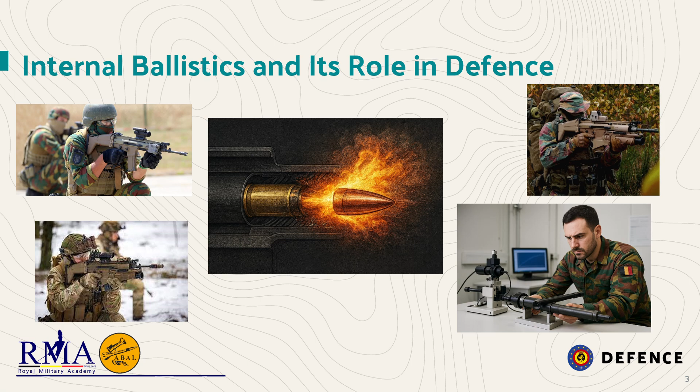This study strengthens this mission by addressing one of defense's most persistent challenges: barrel wear. Today, the end of life of small caliber barrels is decided mainly through experience and simple gauges, with little correlation to firing history or pressure behavior. Our study replaces this empirical approach with a data-driven scientific method based on the most advanced measurement technologies.

Our mission is clear and threefold: quantify, compare, and predict erosion in standard 5.56 x 45 mm barrels. We chose this caliber because it's the workhorse of modern militaries, representing the most common system where reliable performance is non-negotiable. To achieve this, we had to compare wear generated under controlled laboratory conditions with wear observed under realistic operational replication. Furthermore, we evaluated two critical measurement tools: the CMM scanning for high accuracy analysis and pin gauges for field level efficiency.

Ultimately, the goal is predictive maintenance, replacing guesswork and round counting with objective, physics-based data. We need to know a barrel's exact condition and anticipate its lifespan before performance degrades or, critically, before a safety risk emerges.

Barrel erosion is more than just material rubbing off. It's a brutal, complex process. Each shot exposes the bore to some of the most extreme conditions found in any engineered system. We are talking about temperatures above 2000 degrees Celsius, pressures greater than 400 megapascals, and the intense friction as the copper jacket of the projectile engages and deforms into the steel rifling. Add to this the chemical aggressiveness of propellant gases, and you have a perfect storm that removes microscopic layers of steel.

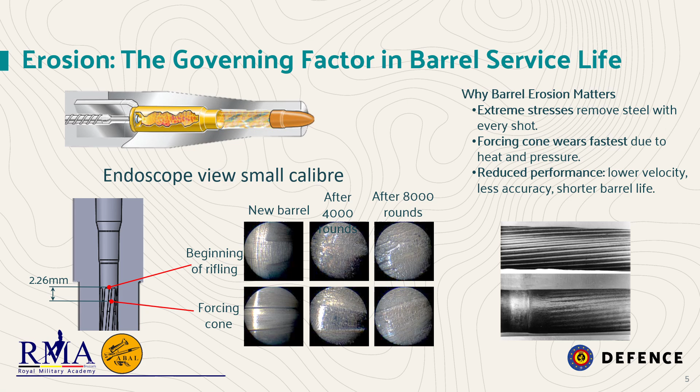Why does this matter? Erosion alters geometry, which in turn affects internal ballistics, leading to a loss of muzzle velocity, reduced pressure consistency, and ultimately a significant drop in accuracy and precision. Over time, it reduces reliability and introduces potential safety risks, making erosion the definitive factor in a barrel service life. To address this problem, we employ the dual platform methodology to ensure our findings are both precise and realistic.

Our first test world was the Ballistic Interchangeable Manometric Cannon, BIMC, in the laboratory. The BIMC provides absolute control over variables. We can isolate pressure curves, control the type of propellant, and maintain a fixed firing rate. This precision allows us to establish the fundamental wear relationship.

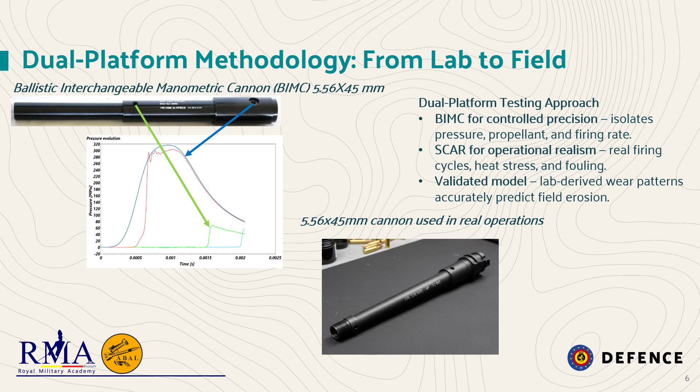Our second test world utilized the FN-SCAR barrel under operational replication. Here, we introduced real-world simulated conditions, varied firing cycles mimicking combat usage, actual temperature spikes and cooling periods, and the inevitable effects of fouling and carbon buildup. By comparing the BIMC's controlled precision with the FN-SCAR's operational realism, we could effectively validate whether laboratory-derived data accurately predicts field-induced wear.

Quantifying this invisible, gradual process of erosion requires sophisticated tools. We needed methods that could map the wear for research purposes, and methods that could be used quickly and reliably by an armorer in the field. This led us to our dual metrology approach. Our philosophy was simple: synergy. We required one tool for micrometric, research-grade precision, and another for robust field-level efficiency.

The first tool is the Coordinate Measuring Machine, or CMM. This provides a high-resolution 3D map of the barrel's internal geometry. It is our absolute ground truth for volumetric wear. The second tool is the simple, yet highly reliable steel pin gauge. This is used for quick, reliable diameter checks directly in the field.

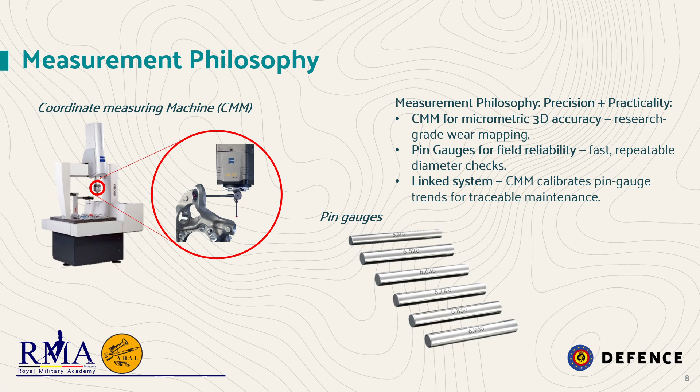The crucial point of our methodology is using the CMM data to validate and calibrate the pin gauge trends. We establish the link between the two, providing a traceable and dependable method for maintenance personnel.

The CMM scanning process using a sophisticated Zeiss Contura provides high-precision geometry mapping. This machine uses non-contact probing to take millions of data points from the bore. Critically, we perform circular scans every 125 micrometers along the forcing cone. That resolution is necessary because erosion isn't uniform.

This can generate detailed 3D wear profiles and dimensional maps. The data then allows us to calculate volumetric material loss. This is the most objective, physics-based metric we have for tracking wear. The CMM effectively transforms otherwise invisible wear into quantifiable volume loss, clearly exposing the severity and localization of the erosion zones.

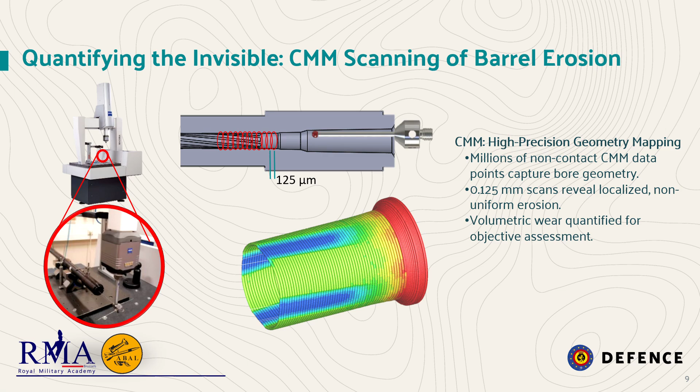In contrast to the CMM, pin gauges represent the practical, fast, and reliable side of our metrology. These are essentially hardened steel rods of precise known diameters used for bore diameter checks. They detect wear in small incremental steps, often down to the tenth of a millimeter or less. They are portable, cost-effective, and require minimal training, making them perfect for routine maintenance level inspections.

The entire procedure, inserting the pin and measuring the depth at which it sits, takes less than 2 minutes. This rapid data acquisition is the key to incorporating our research findings into a workable field maintenance schedule.

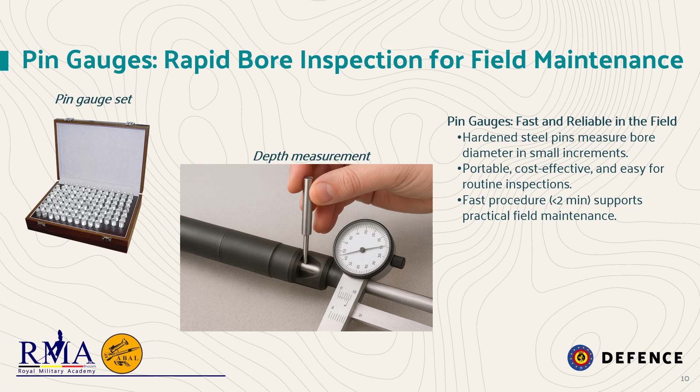This section is the moment of truth. Our research hinges on a core hypothesis. Does controlled wear generated in the lab truly reflect what happens to a soldier's rifle in the field? By comparing the results from the BIMC and the FN-SCAR, we can validate our methodology.

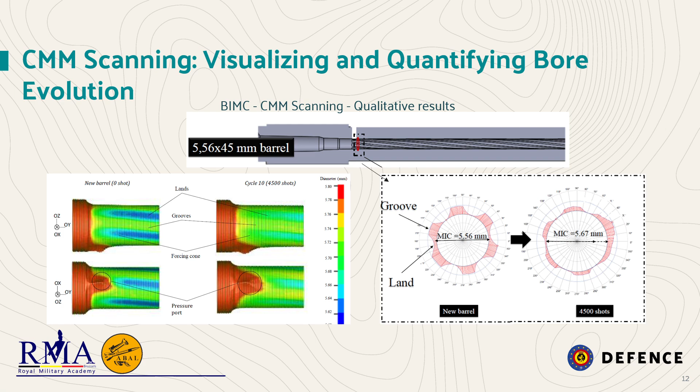This visualization confirms where the wear mechanism is active and provides us with the precise geometry we needed to build accurate predictive models. It turns the invisible erosion process into a clear, measurable continuum.

Here we present the core data from our control laboratory findings using the BIMC. We observed a clear and progressive increase in barrel diameter that is directly proportional to the shot count. The forcing cone was consistently the zone of highest wear.

Crucially, our analysis allowed us to pinpoint when a significant change occurred. We detected a measurable inflection point in the rate of volumetric loss. This volumetric evolution confirms that the wear process is steady and, most importantly, predictable through physical measurements.

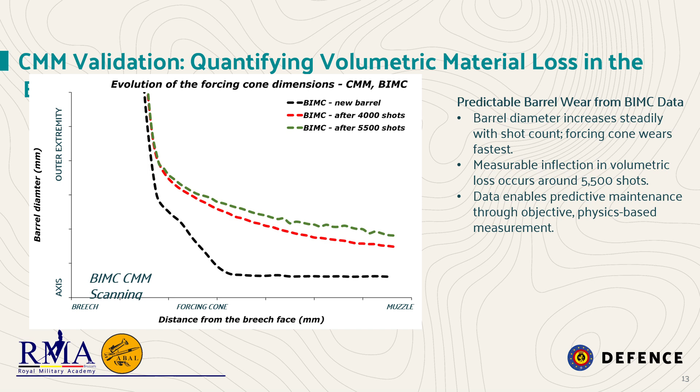This data is the foundation of our predictive maintenance model. Moving to the operational data from the FN SCAR, the pin gauge measurements, which represent simulated real-world weapon behavior, tell an extremely compelling story. The erosion pattern closely reflects what we observe in control laboratory testing. The overall trend remained the same, steady wear centered on the forcing cone.

However, we also see the effect of operational noise. Factors like dust, differences in firing cadence, and carbon buildup introduce additional variability. Despite this expected variability, the trendline confirms that the control laboratory conditions are a powerful proxy for simulated real-world wear, effectively validating the predictive reliability of our BIMC testing setup.

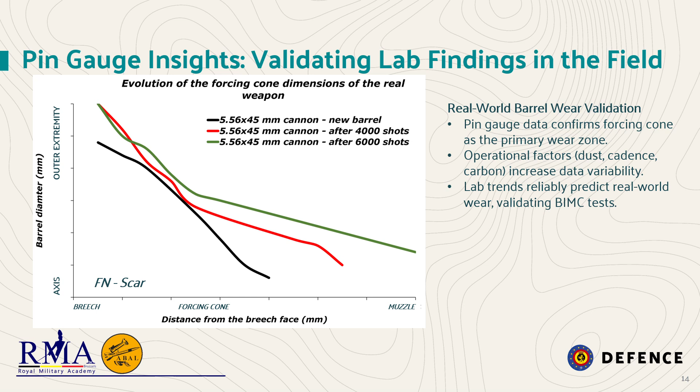When we integrate the CMM and pin gauge data, we confirm the same story inside the barrel for both lab and field trials. The CMM provides the high-fidelity detail, the why the barrel is wearing. The pin gauge confirms the macro trend, the what is happening to the bore diameter. This strong correlation validates the predictability of the laboratory setup and allows for effective cross-validation.

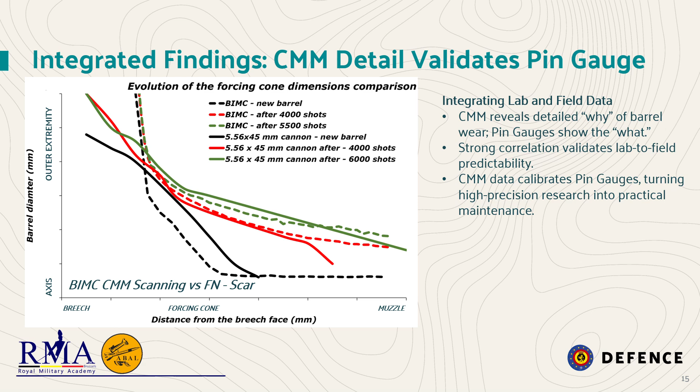This is the key. We can use the CMM scanning to generate calibration tables for the simple and fieldable pin gauges, thereby translating the research-grade accuracy into maintenance practicality. The most significant result for weapon maintenance is presented here. By quantifying erosion as volumetric material loss, we established that the volume increase is directly proportional to the number of rounds fired, showing a nearly linear wear.

This linearity means that the volume loss is a reliable, physics-based metric for barrel lifespan estimation. We can confidently move beyond simple shot counting, which ignores firing conditions, to a true wear-based assessment that directly supports predictive modeling and maintenance scheduling. This model allows us to project the barrel's remaining safe life based on its current measured state of erosion.

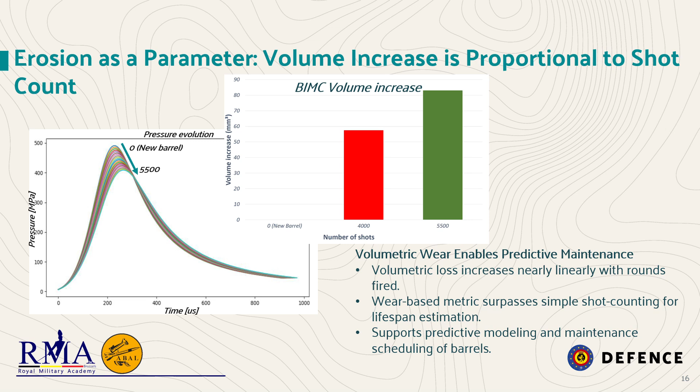We have successfully quantified barrel erosion and established a predictive relationship. Let's summarize the key takeaways and discuss how this work moves forward. Our research provides 4 critical findings. The forcing cone is the critical wear region, making it the target for all future inspection and material science efforts. Erosion can be tracked and predicted through precision metrology, moving barrel maintenance from reactive to proactive.

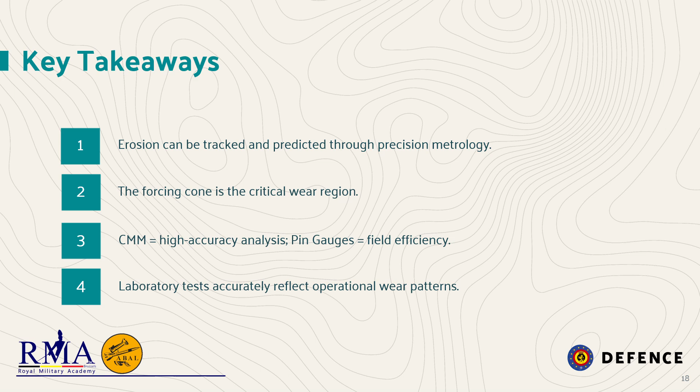We have successfully paired high-tech with low-tech. CMM provides the high-accuracy analysis necessary for research, while pin gauges deliver the field efficiency required for operations. Most importantly, laboratory tests accurately reflect operational wear patterns, giving us the confidence to use control testing to model future weapon performance. The impact of this work is significant for the end user.

This approach enables proactive barrel replacement before failure occurs, which is a dramatic shift in maintenance philosophy. It directly enhances weapon reliability, safety, and overall mission readiness by anticipating degradation rather than reacting to a catastrophic failure. At the same time, it reduces maintenance costs and operational downtime by allowing for efficient scheduling of barrel replacement. We can get the most life out of every barrel while ensuring soldier safety. We are strengthening the link between precision metrology and weapon performance, turning measurement into a key element of operational readiness.

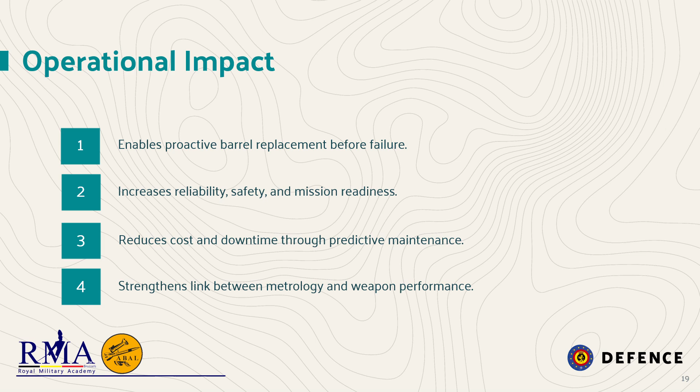Looking ahead, we have 3 steps to further refine this predictive capability. We will enhance CMM scanning strategies to enable even more detailed 3D volume modeling of the erosion topography, which will refine our wear calculations. We plan to refine laboratory firing cycles to more accurately replicate the thermal and mechanical stress profiles experienced in specific operational theaters. Finally, by integrating all laboratory and field data, we aim to develop a hybrid predictive simulation that bridges control testing with simulated real-world behavior using advanced data analytics.

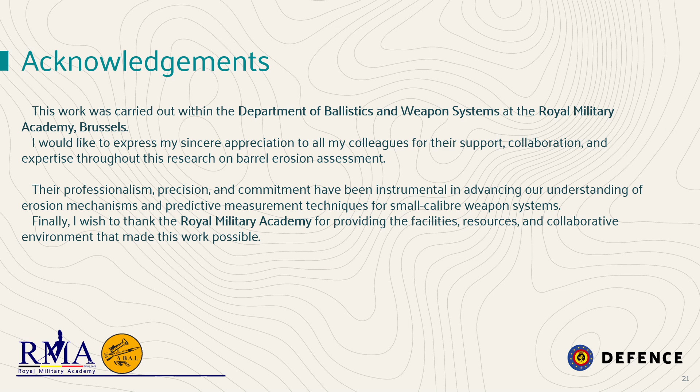To conclude, erosion is not random. It is measurable, predictable, and manageable. By looking inside the barrel with precision metrology, we transform maintenance into prediction.